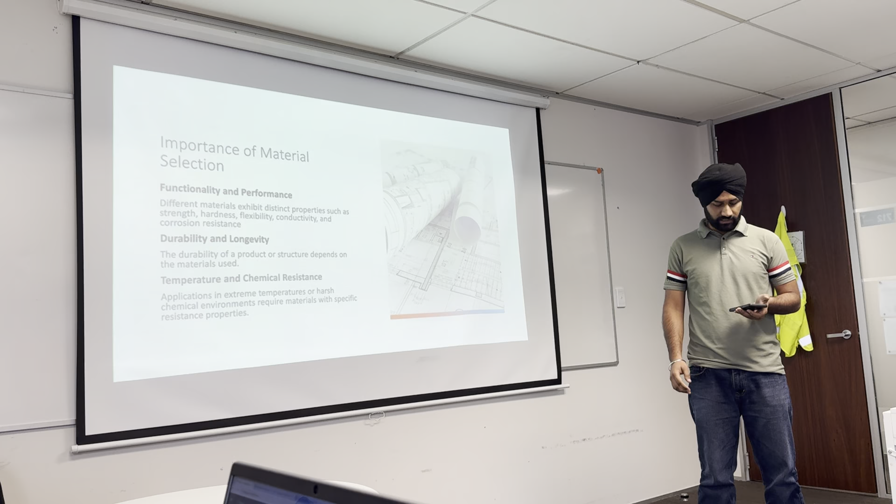And after that, cost efficiency. Material selection plays a significant role in the overall cost of the project. If the cost of materials is quite high but they do not give performance according to that cost, then the cost of the final project is going to be quite high.

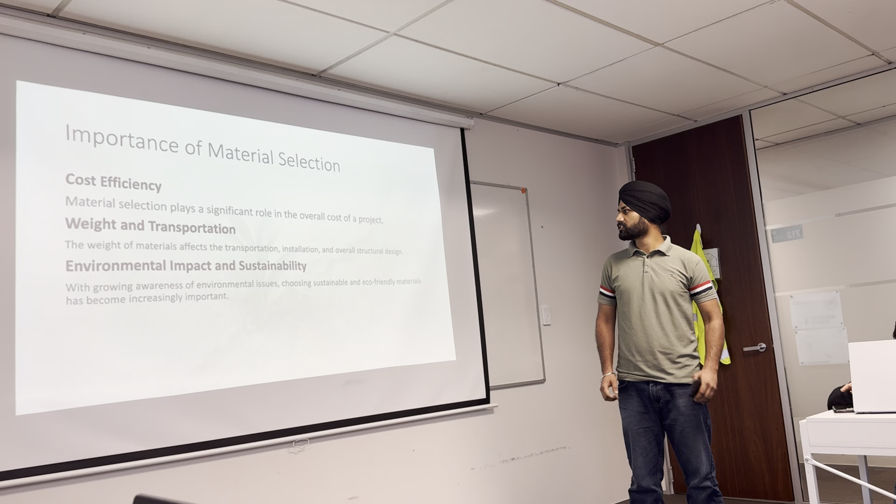And after that is weight and transportation. The weight of materials affects transportation, installation, and overall structural design, as well as environmental impact and sustainability. With the growing awareness of environmental issues, choosing sustainable and eco-friendly materials has become increasingly important. So we have to choose materials that are recyclable after their use, like some types of timber, which remain usable even after this use.

So, common hazardous materials and finishes in construction.

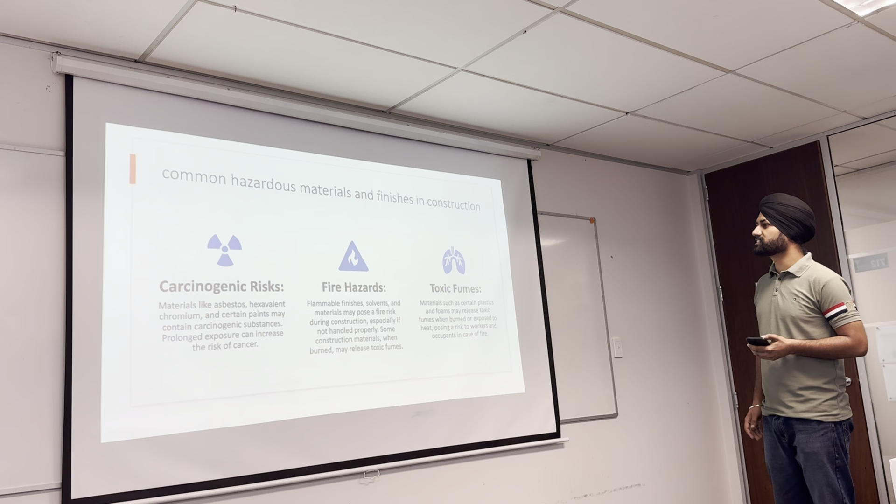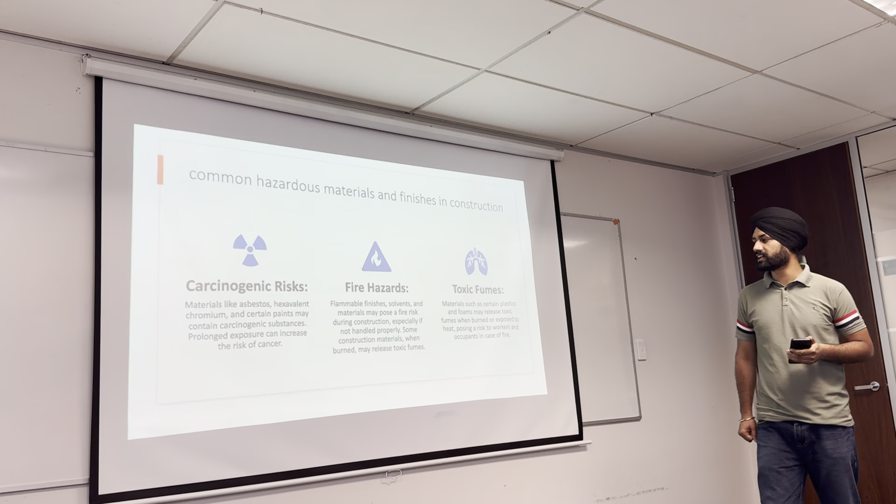Carcinogenic risks: materials like asbestos, hexavalent chromium, and certain paints may contain carcinogenic substances. Prolonged exposure can increase the risk of cancer. Also, some paints, when applied, give some workers a sore throat and eye irritation.

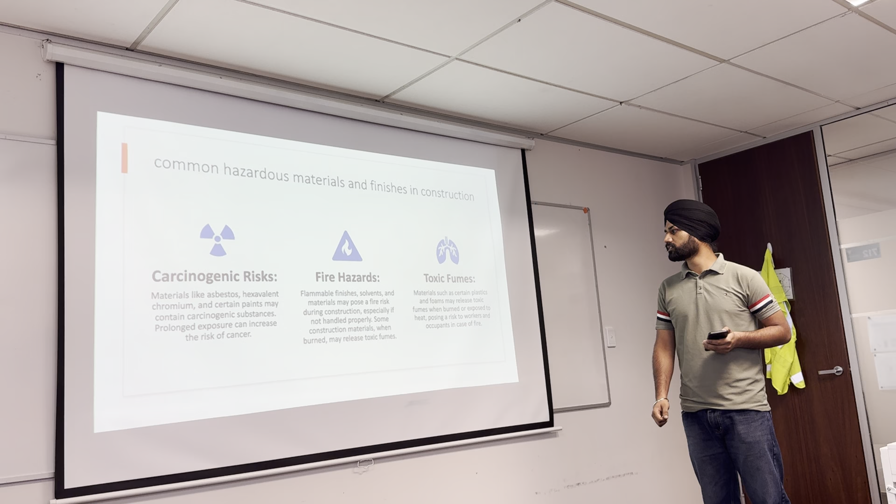And after that, fire hazards: flammable finishes, solvents, and materials may pose a fire risk during construction, especially if not handled properly. Some construction materials, when burned, may release toxic fumes.

After that is toxic fumes. Materials such as certain plastics and foams may release toxic fumes when burned or exposed to heat, posing a risk to workers and occupants in case of fire.

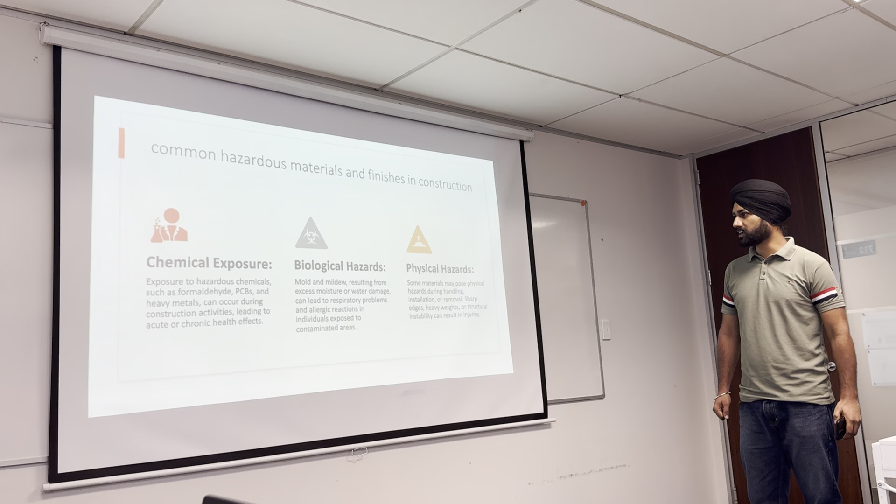Chemical exposure: exposure to hazardous chemicals such as formaldehyde, PCBs, and heavy metals can occur during construction activities, leading to acute or chronic health effects.

And after that is biological hazards. Mold and mildew resulting from excess moisture or water damage can lead to respiratory problems and allergic reactions in individuals exposed to contaminated areas. On the side of physical hazards, some materials may pose physical hazards during handling, installation, or removal. Sharp edges, heavy weights, or structural instability can result in injuries.

So, common hazardous materials and finishes: first is asbestos, found in insulation, roofing materials, and floor tiles. Asbestos was commonly used in construction before its health risks were widely recognized in every construction field. Disturbing asbestos-containing material can release harmful fibers into the air, and inhalation of asbestos can lead to...

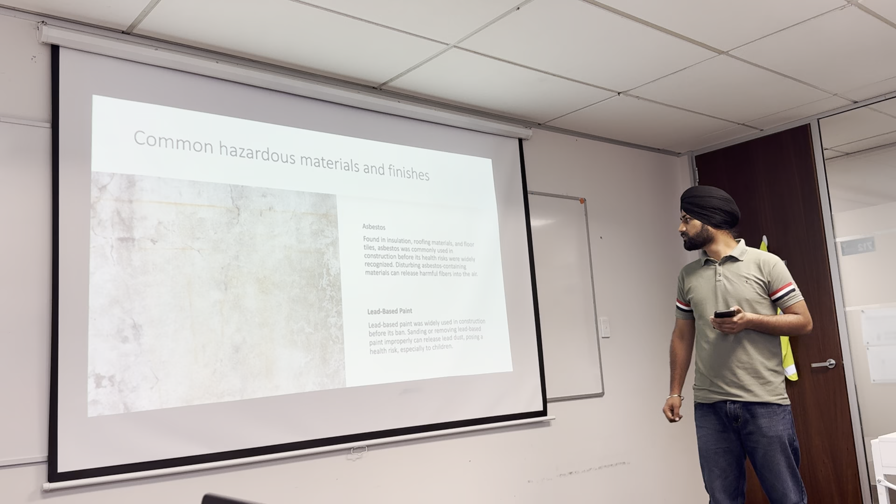...respiratory diseases. So after that is lead-based paint. Lead-based paint was widely used in construction before its ban. Sanding or removing lead-based paint improperly can release lead dust, posing a high health risk, especially to children.

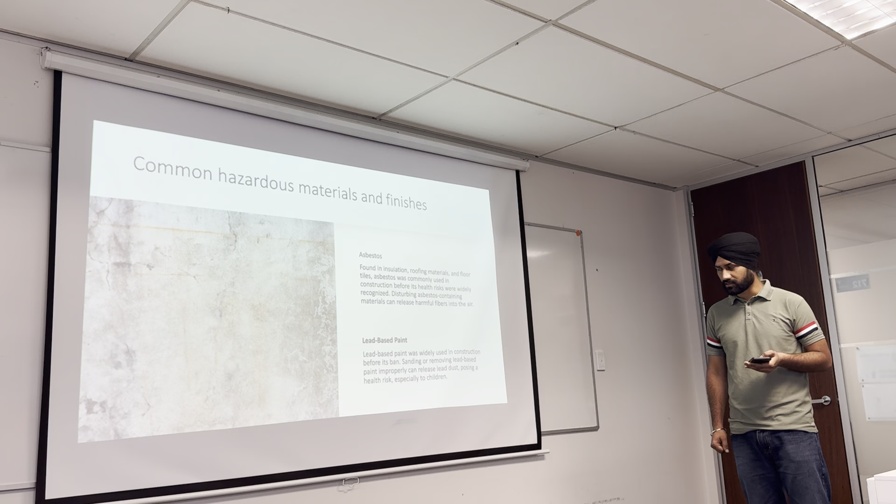So, common hazardous materials and finishes in construction, continued on the next slide. Respiratory hazards: materials like asbestos, silica, isocyanates, and volatile organic compounds can release airborne particles or fumes that, when inhaled, may lead to respiratory issues, irritation, or long-term health problems.

Lead poisoning: lead-based paint, commonly found in older buildings, poses a risk when disturbed. Inhaling or ingesting lead dust can lead to poisoning, which can affect the nervous system, kidneys, and other organs, particularly in children.

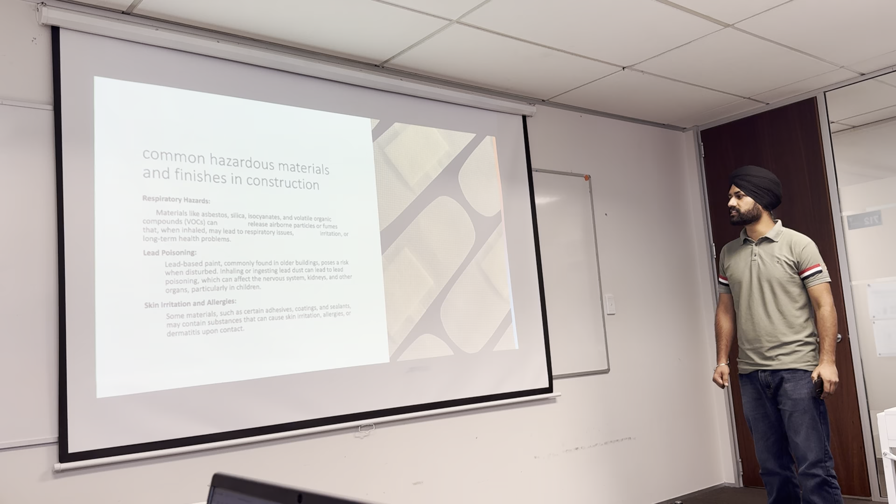And after that is skin irritation and allergies. Some materials, such as certain adhesives, coatings, and sealants, may contain substances that cause skin irritation, allergies, or dermatitis upon contact.

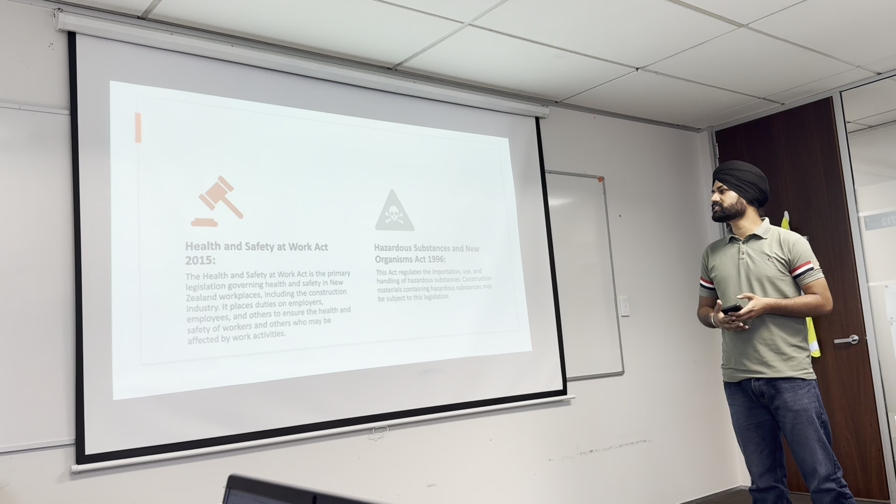So here are some rules and regulations that the New Zealand government applies to make work safe in New Zealand. First is the Health and Safety at Work Act, the primary legislation governing health and safety in New Zealand workplaces, including the construction industry. It places a duty on employers, employees and others to ensure the health and safety of workers and others who may be affected by work activities.

After that is the Hazardous Substances and New Organisms Act 1996. This act regulates the importation, use and handling of hazardous substances. Construction material containing hazardous substances may be subjected to this legislation.

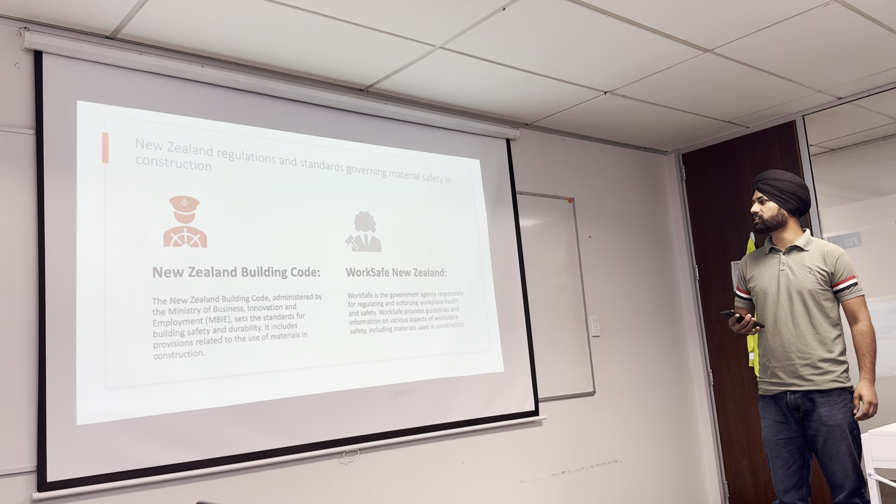After that is the New Zealand Building Code, administered by the Ministry of Business, Innovation and Employment, which sets the standard for building safety and durability. It includes provisions related to the use of materials in construction.

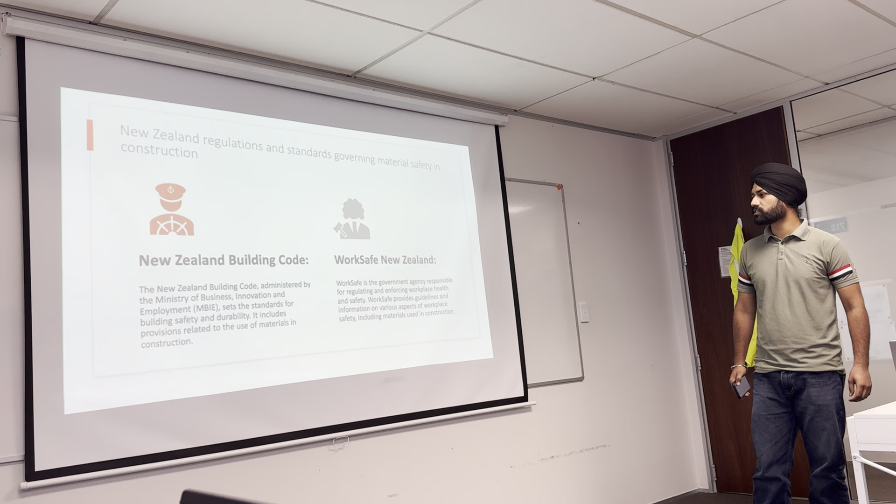After that is WorkSafe New Zealand. WorkSafe is the government agency responsible for regulating and enforcing workplace health and safety. WorkSafe provides guidelines and information on various aspects of workplace safety, including materials used in construction.

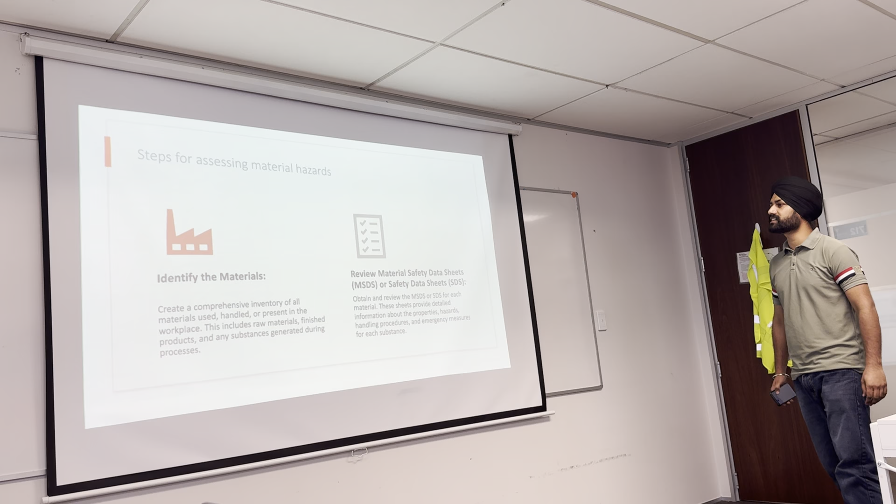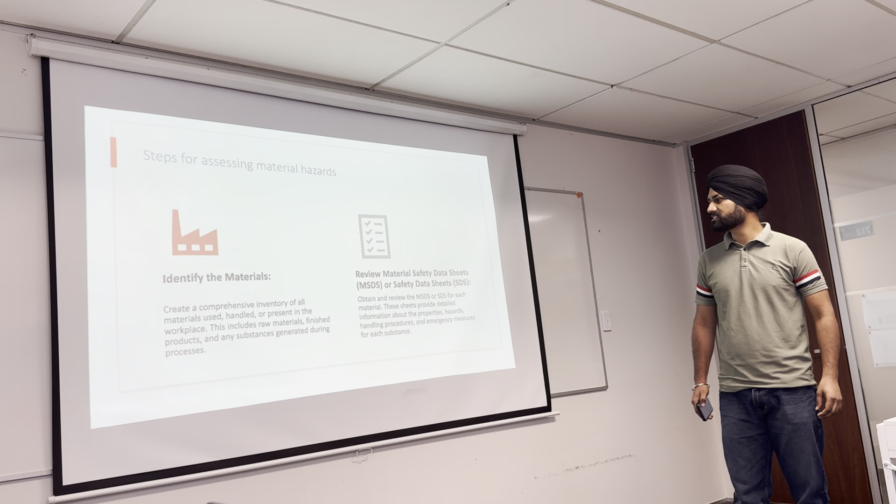So what are the steps for assessing material hazards? First, identify materials. We have to identify materials by their properties, what their raw forms are, finished products, and any substances generated during processing.

After that is reviewing Material Safety Data Sheets. We have to obtain and review MSDS or SDS for each material. These sheets provide detailed information about the properties, hazards, handling procedures, and emergency measures for each substance.

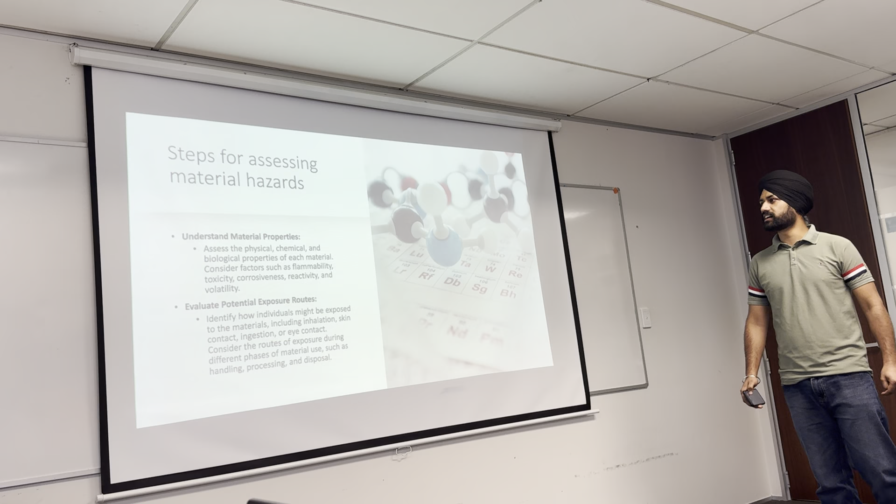After that is understanding the material properties. Assess the physical, chemical, and biological properties of each material. Consider factors such as flammability, toxicity, corrosiveness, reactivity and volatility.

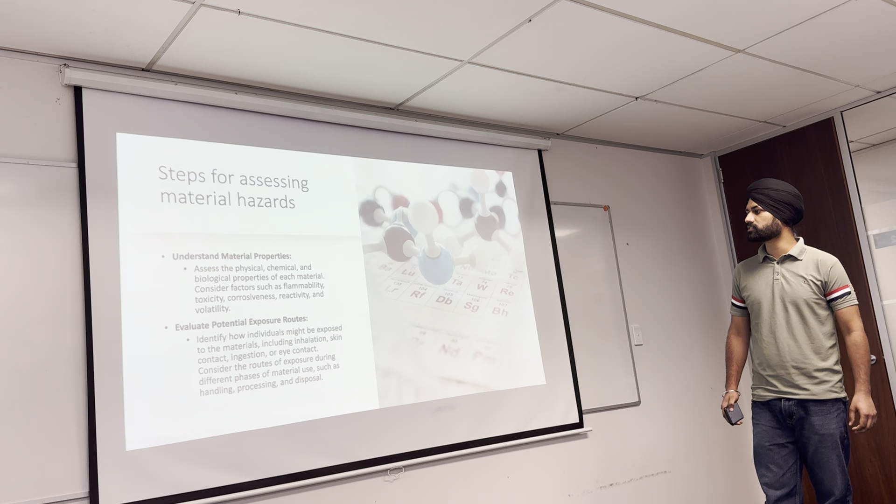Evaluate potential exposure routes. Identify how individuals might be exposed to the materials, including inhalation, skin contact, ingestion or eye contact. Consider the routes of exposure during different phases of material use, such as handling, processing and disposal.

In New Zealand, regulations such as the Health and Safety at Work Act and the Hazardous Substances and New Organisms Act govern material safety in construction. Assessing material hazards involves a systematic process including identifying materials, reviewing safety data, understanding properties, and implementing controls. So in my case study, I found out that all the materials have their pros and cons, so we have to select the materials carefully. Thank you very much.

There's a timer. Thank you. You have to face my question.